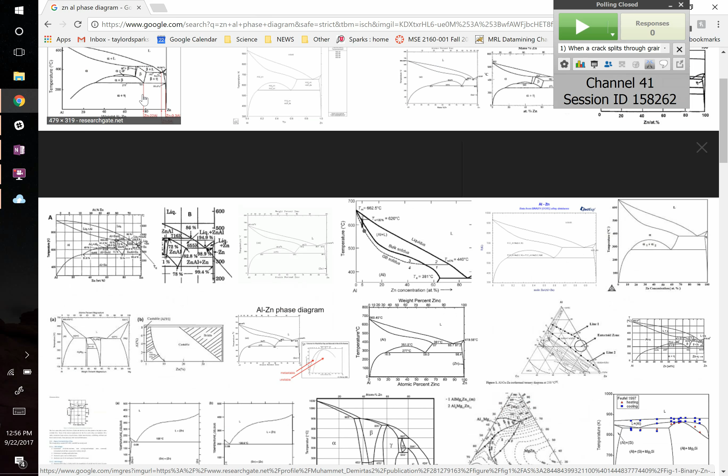It'll probably stop getting warm momentarily. Okay, anybody else getting warm? Or a bunch of duds, maybe? We have at least one work. Well, it's not cold, it's no longer cold, it's now hand warm.

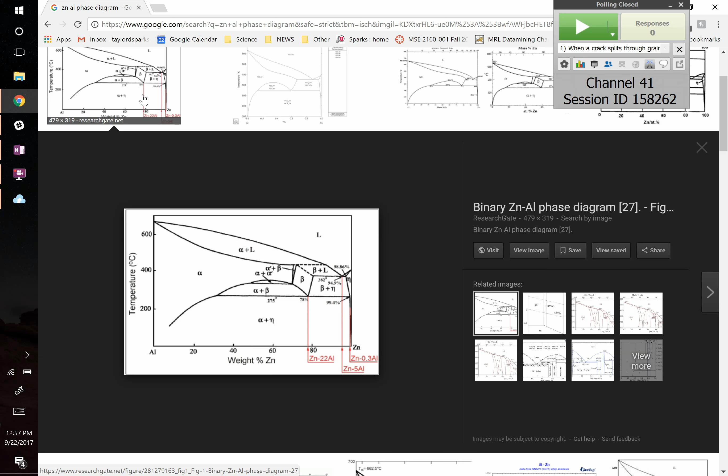Okay, while they are waiting for hopefully a few more of these things to get warm, let's try and explain what's going on. In this example, we made aluminum and zinc alloys. So we alloyed aluminum and zinc, we heated them up, we chose the composition to be exactly at 78 weight% zinc. The reason we chose that is because this is kind of a nasty looking phase diagram, and it's got some things that we haven't seen before.

You've got this alpha plus liquid, alpha over here, but then when you start going left to right, you see something kind of funny. You see this point where alpha will split to alpha plus alpha prime. This region at the top of that little disk there, that is a 2-phase region, because it's got one phase on either side of it, so it must be a 2-phase region. So what's happening there is that you have an alloy that's spontaneously decomposing into 2 different compositions.

It's not happy to stay all together. And this happens just like oil and water. If you take oil and water and mix them, they'll spontaneously demix. They're immiscible, so that's an immiscible liquid. You can also have immiscible solids.

Is that one getting warm? This one's getting warm too. Okay, so basically because of that, you get this interesting phase diagram.

What we chose to do is we made it this composition, we melted it, we cast them into shapes. By casting it, you pour it into cold sand in these kind of funny looking shapes, and now it's at room temperature. They then reheated it back up above this line. That's what's critical, it's got to be above 275. So now you're ideally in just this beta region.

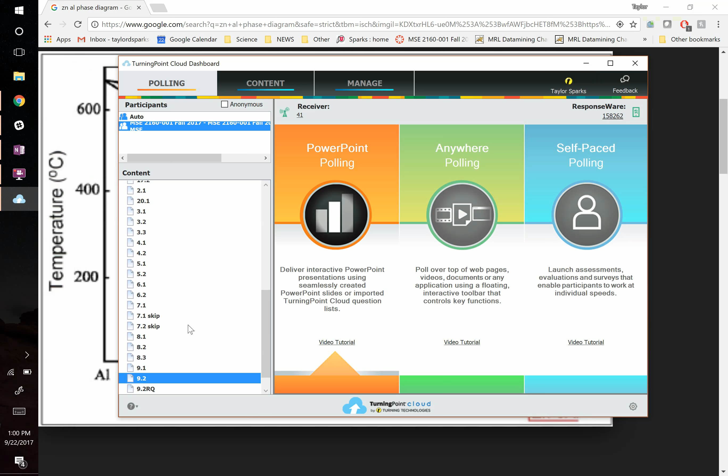First clicker question is: fatigue is A, common in load-bearing components; B, the lowering of strength in material due to repetitive stress; C, crack formation and crack propagation that eventually leads to a crack which is large enough to satisfy the critical flaw size for failure; or D, all of the above.

Absolutely. The rocket ship.

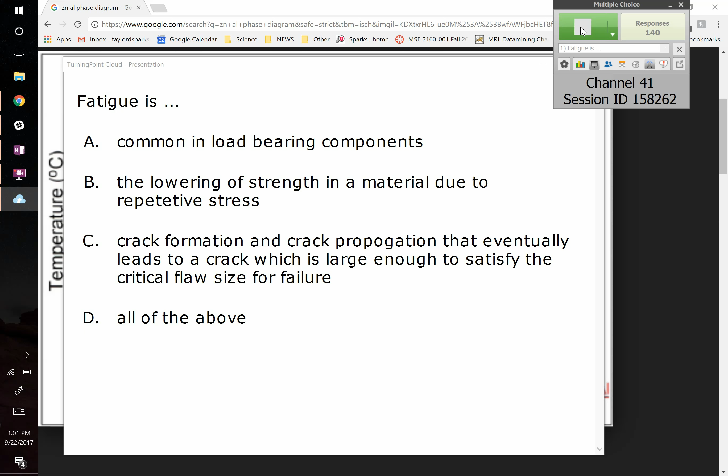Okay, get your answers in. We're going to close the poll for the first question. Okay, people think A, B, C, or D. D is definitely the right answer there.

Next one: a material with a fatigue limit will continually grow weaker and weaker as cycles progress. True or false?

Jeff, when you start from cycle 1 and cycle it to an arbitrary number, it will always grow weaker and weaker—is that statement true or false? By weaker and weaker, what I'm saying is it's going to fail at a lower and lower stress. Is that a true or false statement? Get your answers in.

That is definitely false. When a material has a fatigue limit, it basically has a threshold, and below that it's not going to fail due to fatigue. So it doesn't get weaker and weaker—it gets weaker until a point, and then it plateaus, and then you're good. Aluminum doesn't have a fatigue limit, which is why aluminum will just get weaker and weaker if you flex it back and forth, but steel does—it reaches a bottom limit.

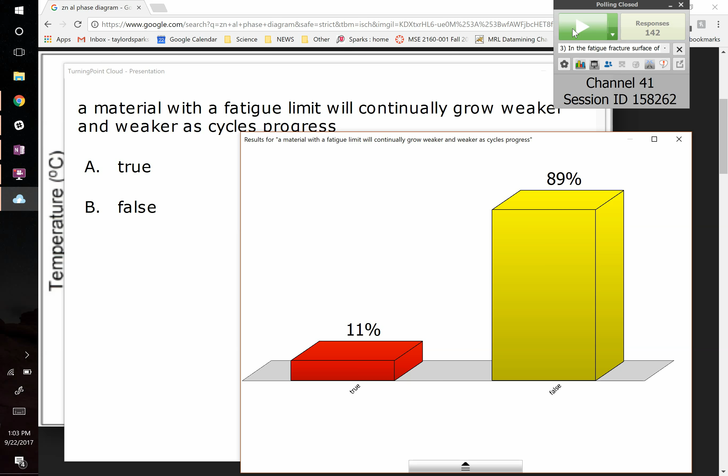In the fatigue fracture surface of a steel shaft shown here, which of the three regions illustrates the propagation of the fatigue crack with beach markings? So where do you see beach markings? Hint: they look kind of like a beach.

Okay, we're going to close the poll. People think, hopefully, B—yes they do.

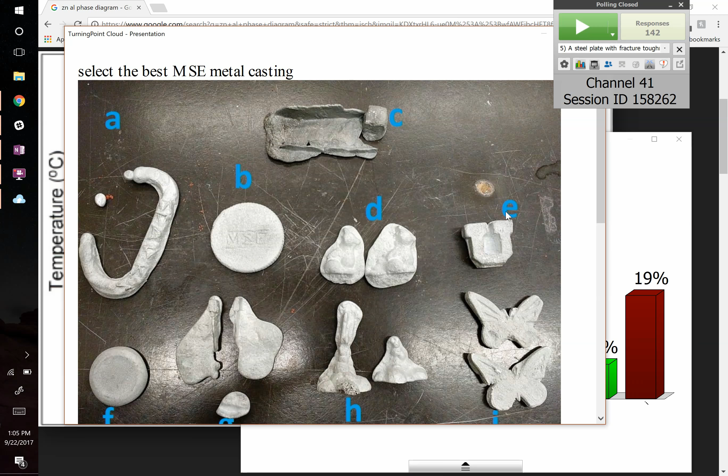Okay, we're now going to pick up where we left off with this crack growth equation. Let me remind you the question: a steel plate is given, and you know the fracture toughness. We're told it's alternately loaded between 500 megapascals tension and 60 megapascals compression. We know what the crack growth constants are, A and N, sometimes called C and M—I apologize, I did not make the rules, some people use different names. In the homework we have A and M, so M and N you can use interchangeably; it's still the exponent, so I apologize for that. Then it asks: if this thing has to survive 10 years being cycled every 5 minutes, how big can the largest surface flaw be?

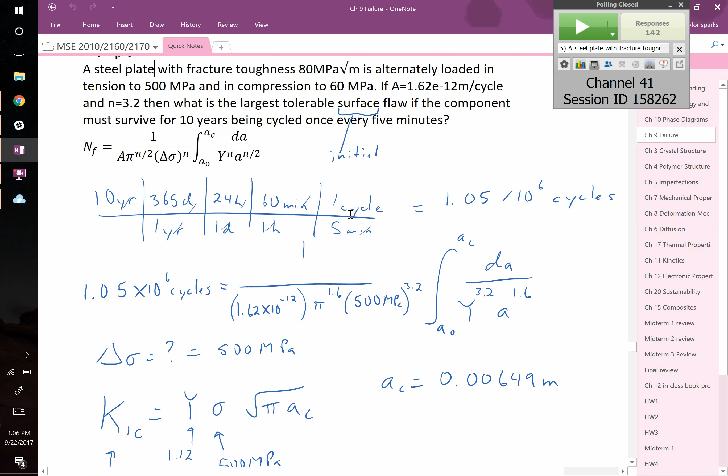Because you're going to assume that surface flaw is going to grow over the lifetime of this component, so how big can it be? We set this up by first solving for the number of cycles it had to survive, going from years to minutes, then dividing by 5. We then said the number of cycles will be equal to 1 over A pi change in stress, raised to the n, raised to the n over 2.

The change in stress, we did not account for compressive stress, because in this class we assume cracks only grow under tension, which is not always true. But for mode 1 cracking, that's the assumption we're making. That's multiplied by the integral from the initial crack size to the final crack size, or the critical crack size, dA y to the n, a to the n over 2.

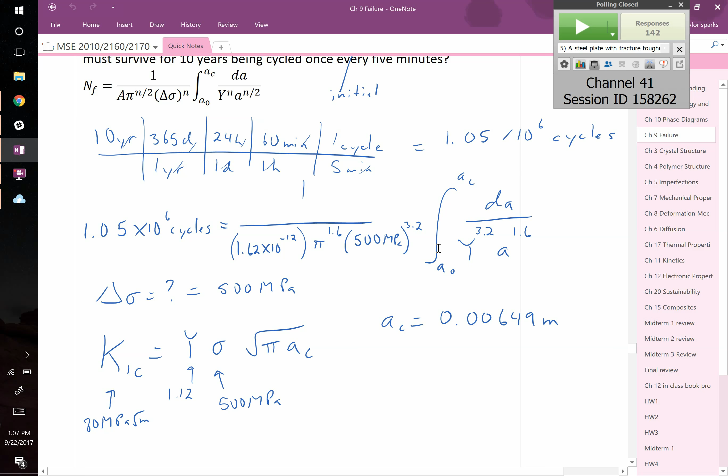And then we reminded ourselves, how are we going to solve this since it's asking for A naught, and we have 2 unknowns right now, both AC and A naught. We remembered that we can use the Griffith fracture toughness equation to solve for AC. The critical flaw size is going to be 6.49 millimeters. So our initial flaw size, we know it has to at least be smaller than that, but how much smaller?

So the next step, for the next clicker question, I'm going to have you finish this by evaluating what's in front of this integral, evaluating the definite integral, and solving for A naught. We'll do 5 minutes tops for this. You'll put your answer in micrometers.

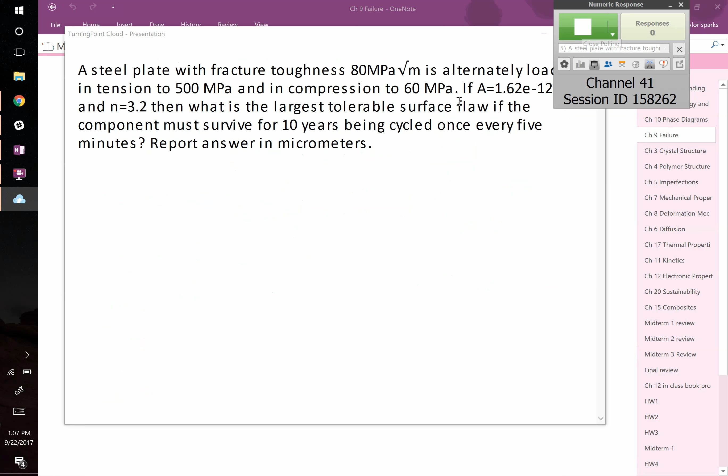Yes, in this case you're going to assume that y is constant. If I don't tell you otherwise, you can assume that y equals 1.12, and therefore it can come out of the integral. On a midterm, that's all I will ever do. On a homework, you have an example where you have to leave y in. For this class, you can bring it out on the midterms. And if you need help, we have a couple TAs, so raise your hand and we can come around and help.

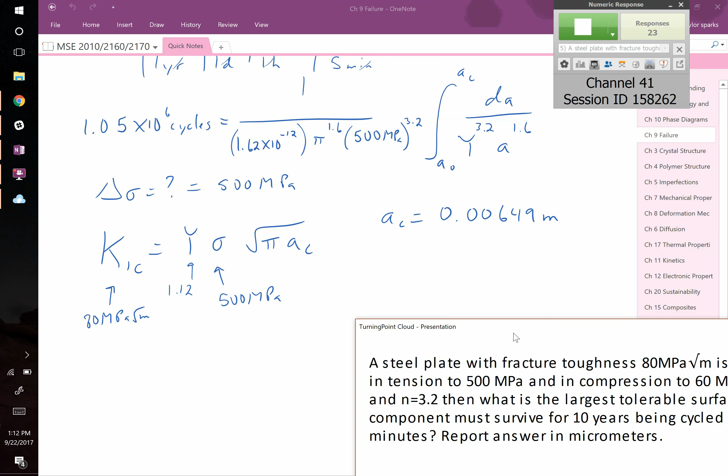For those that have forgotten how to take that integral, I'll write this out. 1.05 times 10 to the 6th cycles equals, well, let's just write a number in front of the integral. The integral, when you evaluate it, you're going to evaluate from AC to A naught, and the integral itself is going to be -5 over 3a to the 3/5, or in other words, -1.667 over a to the 0.6. You evaluate that from AC, which you know, to A naught.

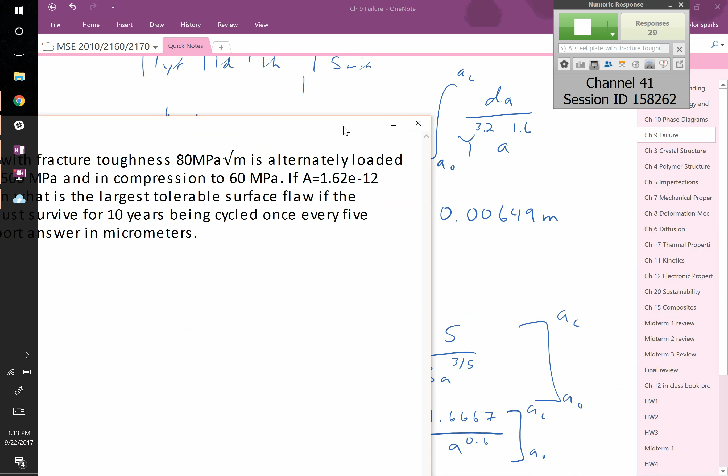Okay, another couple minutes, we'll wrap this up. I'm going to get this out of the way, but remember, you need your answer in micrometers.

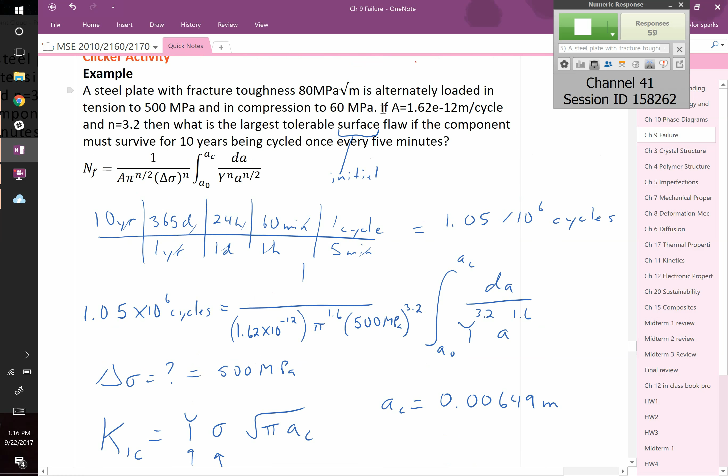Okay, there was a good question on units. Somebody asked, do you have to convert this 500 megapascals to pascals? No, you can leave that in megapascals in this question. The way you know that is they normally give that in your units here for your A and M. In this case, if you leave that in megapascals and you do these, you're going to get your answer in meters for your crack length. So to go from meters to micrometers, multiply it by 1,000,000.

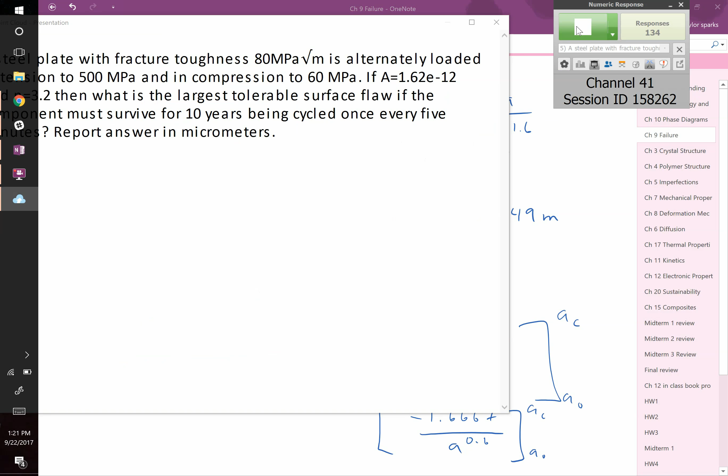Okay. If I leave y in the integral, I get 1.159 over a to the 0.6. Right, that's leaving y in, or you could factor y out and have the answer I showed you before.

You're evaluating that from a naught, which we do not know, up to ac, which we do know, 0.00649 meters. I plug in the next step and I get is equal to 264.66 over a naught to the 0.6 minus 5438. And finally, solving for a naught, I come up with 9.97 times 10 to the negative 7 meters.

And when you convert that to micrometers, you multiply it by 1 million. So that's just equal to 0.997 micrometers. So if you put in anything from like 0.8 to 1.2, you would have gotten the right answer there.

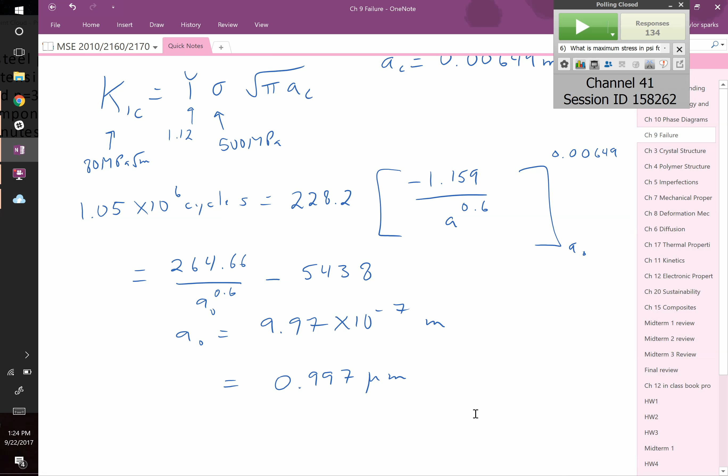I have one question. Yeah. How likely is it that something like that will be on the test, and how much of that whole process will we have to know?

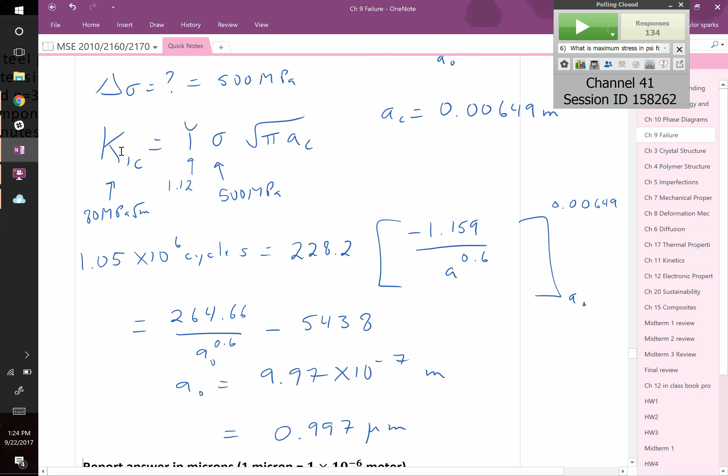This will, without a doubt, be on the test. And you'll need to know how to use the NF equals the big long equation integral. You'll need to know either how to take the integral yourself or know how to use the pre-written solution that's in the book. You'll need to know how to use Griffith's fracture law, maybe to figure out a critical flaw size, assuming that you knew the starting flaw size. There's lots of ways to ask these questions.

I could ask for the number of cycles till failure. I could ask for what the initial flaw size was, like in this one, or I could say how many cycles, if it lasts a million, how big was the largest flaw size when it did fail? So lots of things we could ask. I could have you solve for the critical flaw size, and then I could say, therefore, tell me what the fracture toughness of your material is, where then you plug that back into Griffith's fracture toughness. So a gazillion ways to ask questions about this.

Just like before, we'll post a practice midterm that will show you a few ways we've done it in the past. But really, there's no substitute for practicing this and making sure that you can work it relatively quickly, because you won't have 15 minutes to work on just that part. You'll have about 7 or 8.

Yeah, Jan? Question about the first reading quiz question. Question about, sorry, what's that? Just the first reading quiz. Okay, what was it? So something under like a constant level, does that experience any sort of cyclical cycles of stress, or is it just purely?

Good question. If it's a constant load, we mentioned this last class, things can fail under a constant load. We call that static fatigue. It's particularly important for ceramics. Static fatigue meaning it's under a static, so it's not changing load.

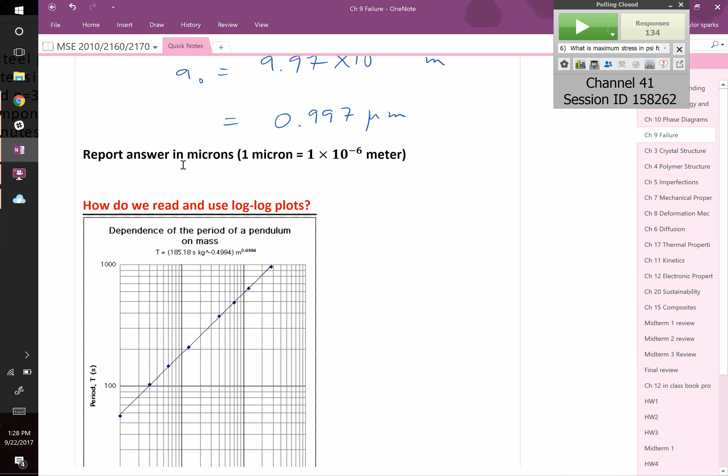Anthony asked: what was an ultrasonic scanner though? Could that also cause some of these cracks to grow as well? Yeah, you betcha, right? An ultrasonic scanner produces a little vibration. Will that grow the crack? Sure, probably a tiny, tiny insignificant amount, because the amount of energy from the ultrasonic is really, really small—nothing compared to the flexing the plane experiences when it flies.

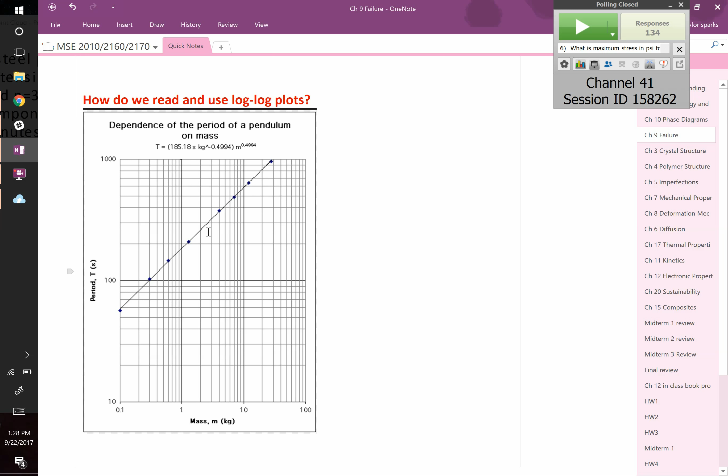Okay, let's answer the question: how do you read and use log plots? This came up last year as well, I forgot to talk about it sooner. Log plots are useful for making things that aren't linear look linear—that's really the only reason why we use them. Back in the day when we didn't have a computer that could solve all our problems easily, it was much nicer to make complex mathematical expressions look linear, and sometimes that can be done by plotting them on log plots. An example is what we saw last time.

You had this dA over dN equals A times the range in the stress intensity factor raised to the n. That's an exponential figure, right? But if you plot it on a log plot, where you're plotting natural log of dA/dN against the natural log of the stress intensity factor range, it looks linear.

So how do you read these plots? First thing to know is that their major and minor axes are scaled differently. By major and minor axes I mean major and minor tick marks—that's maybe a better way to put it. Your major tick marks are equally spaced: here's a major tick mark, a major tick mark, a major tick mark. But the minor tick marks are not spaced equally; you take this big jump and it gets progressively smaller as you approach the major tick mark.

Every major tick mark goes up by one decade, or one power of 10. It goes from 10, multiplied by 10 is now 100, multiplied by 10 again is 1,000. So if we did the next one down, it would be 1, and then it'd be 0.1 below that, and you could keep on going.

Because of that, your log plot can never reach 0. It's just going to keep on dividing by 10, and it'll never actually reach 0.

The other thing to note, when you look at the minor axes, let's take this one. If this is 100, the next minor tick mark up is 200, then 300, 400, 500, 600, 700, 800, 900, and 1,000. But instead of going to 1,100, the next tick mark up would be 2,000, because you go 1,000 to 2,000.

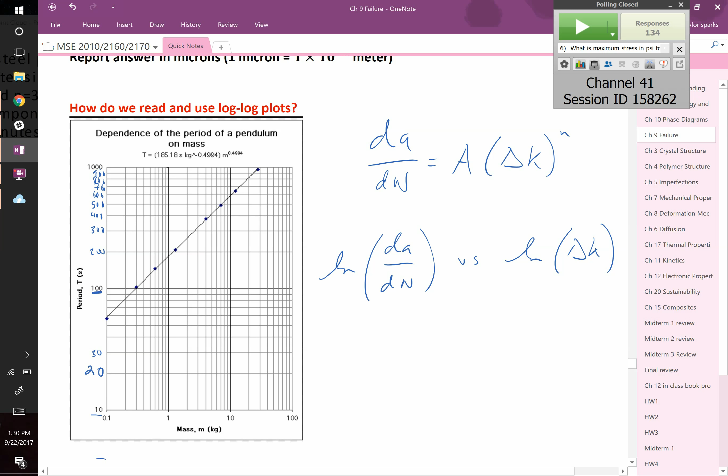Arthur asked, is that 20 or 28? That's an ugly 20. They go in powers of 10, right?

Okay, let's keep going. So what other factors affect fatigue life? Mean stress. So, mean stress.

Let's say that your materials have the same amplitude, stress amplitude. What was stress amplitude again? Again, stress amplitude, if your stress is doing something like that, your stress amplitude is this distance divided by 2. So that distance is sigma A, right?

Rosa asked, what if 0 is in the middle? Why do we take the amplitude divided by half and not just go, like what if this is 0 there, up to like 100? Because it's still the range that we're talking about, right?

So it's going to be, when we look at dA/dN equals A times delta K to the N. Delta K is equal to K max minus K min. So the minimum stress intensity factor subtracted from the maximum stress intensity factor. So it's a range, right?

In other words, it's going to be the oscillation around some point. So that's your stress amplitude. That's not the same as your mean stress. Your mean stress is up here, right? That's your mean stress. So if two materials have the same stress amplitude, right?

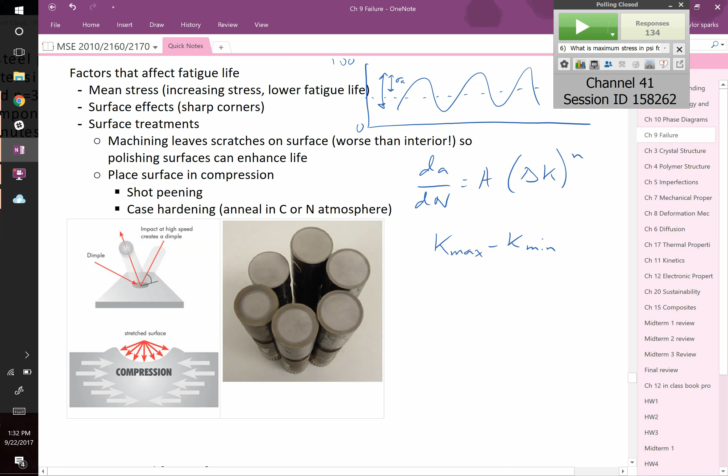So let's say 100 cycling to 200, versus 50 cycling to 150. Both of those have a stress amplitude of 50. Wait, math, sorry. Oh, that's right. Is that right? Yeah, that's right. They both have the same stress amplitude.

They have different mean or average stress. And so if all things are equal, then the mean stress, the one that is larger, will give you a shorter fatigue life. Rich, I think you have a question on that on the homework, where it turns out the range is the same, but the average, the mean stress, is higher for one than the other.

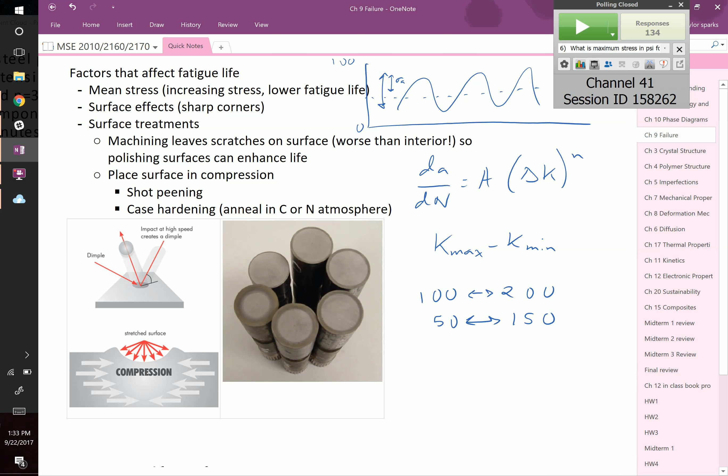Arthur asked, if we have a homework problem where there's two types of stresses, for example the first one where there's one that's like 500 and the other that's 200, if we have to plug a stress into the equation to find, say, KIC, do we plug in the amplitude or just the one that's the biggest?

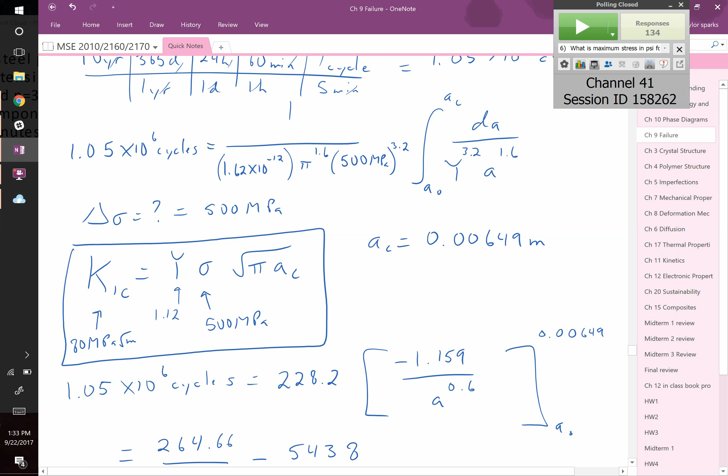Great question. It depends on which equation you're putting it into. If you're using the Griffith fracture toughness equation right here, this is telling you when something breaks. So that will not break from a range, that's going to break from a maximum value, right?

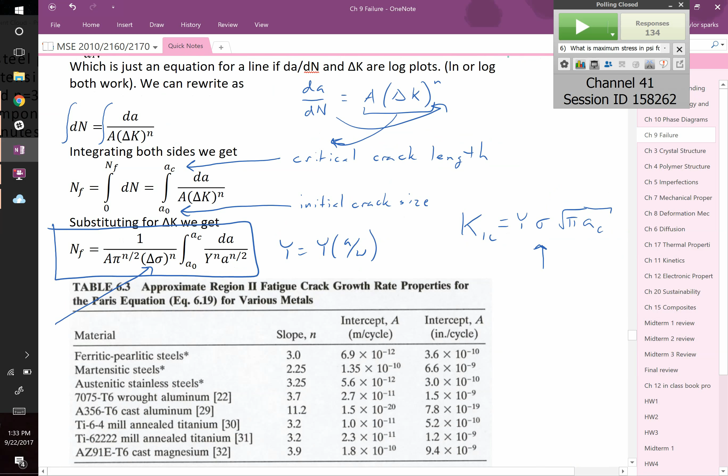But if you're using this equation, where do we have it written out? Right here. If you're using this equation, you use the range for it. Your delta sigma there is the change. Anything else I can clarify here?

Okay, other things that can influence it: surface effects. Obviously we know surfaces are a problem because your crack is basically twice as dangerous at the surface. If it's the same length, it's twice as dangerous. Because of that, there's a lot of surface treatments that they do. For example, when you do machining, all you're doing is scratching the surface in a controlled way, like taking sandpaper and just scratching it.

Hopefully you're removing flaws that were there that were larger than the flaws that you're going to put in there by scratching it. So if you have like a big millimeter deep scratch in your component, but you polish it with like 600 grit sandpaper, your scratch marks are tiny, way smaller than 1 millimeter. So you've overall improved your sample there.

They do other things though. They'll do something called shot peening, or case hardening. Both of these place the surface in compression. Again, with crack growth, we're assuming that cracks don't grow under compression - that's valid in some circumstances. So if you can put something in compression, before it can reach a tensile state it has to overcome that compression. If tension is going to make that crack grow, but you start off by squeezing it, it has to overcome that squeezing force first, and then it can start pulling it apart. So putting it under surface compression is a great idea.

One way they do that is shot peening, where they basically hit it with like BB guns. It's more scientific than that though - they spray it with little tiny beads, and it puts a bunch of little indents in, densifying the material around it and putting it all under compression.

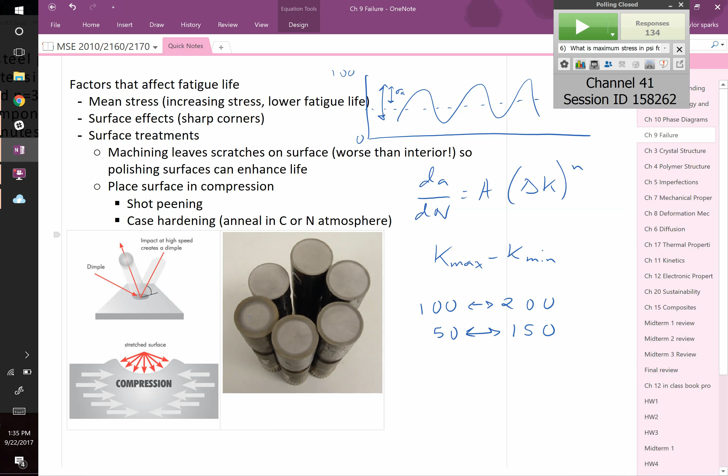Another way, which we'll talk about in a few chapters, is case hardening, where you diffuse in a larger atom, or just atoms that will fit in between the other atoms and squeeze it closer together. So you can do it with carbon or nitrogen. That's how titanium carbide or titanium nitrides are made, which have a harder surface than the bulk underneath. We'll come back to that later.

All right, let's talk about other factors - thermal stress. We've mentioned this over and over, that even though you don't think your part's under oscillating stress, temperature range can be a big deal. So the stress that it produces, the thermal stress, is going to be equal to the difference in the thermal expansion of your two materials. That's delta alpha L.

So basically you have the thermal expansion L for, let's say, your ceramic, minus the thermal expansion L for a metal. These things are typically about an order of magnitude apart, so that value right there could be an order of magnitude - call it 10 for a moment, or, well, I guess it depends. That's multiplied by the modulus of the material that's going to fail, times the change in temperature.

So if you have a big ceramic plate and you bond it to a piece of metal, and then you cycle this thing - put it in ice water, hot water, ice water, hot water - the one that's going to break is definitely going to be the ceramic, because it's the one that can't tolerate stress, or strain, excuse me. So you could calculate the amount of stress generated by plugging in the modulus of your ceramic, multiplied by the difference in thermal expansion and the difference in temperature. That will give you your thermal stress. Questions on thermal stress?

Yeah, Jeff - so they use the modulus of the one that will break. Now, if you don't know which one's going to break, you could calculate it both ways. You could plug in the stress assuming ceramic, and then calculate the stress in your metal. It's valid, and it's the same stress - one's going to be compressive, one's going to be tensile, but it's the same magnitude. The one that's under tension is usually the one that breaks, and it's usually the brittle material that breaks.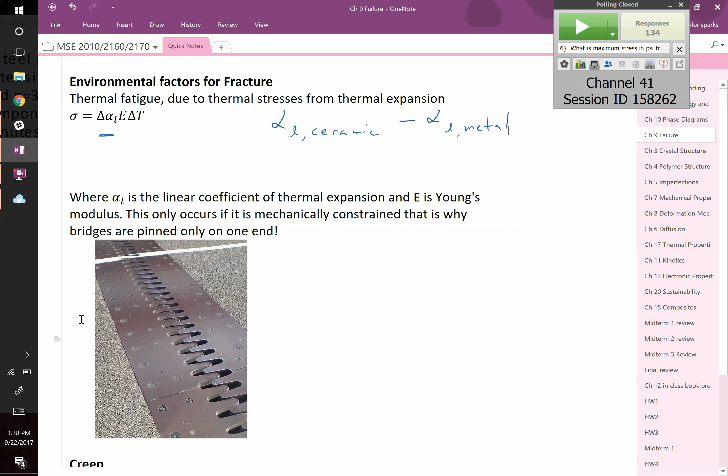Again, in your statics class, if you've taken it yet, you notice that they'll pin one side, but they'll put the other side of the bridge on a roller. That's exactly why they do this - you can't pin both sides or you generate huge thermal stresses.

Okay, let's talk about creep. Creep is another property that's really important for material science. What is creep? Creep is time-dependent, permanent plastic deformation.

Which means if I take something like this bottle, and I hold it here like this, it has a stress on it - the weight of this water and the fact that I'm supporting it from the ends tells me that there's a bending moment in this. It's going to have a maximum stress in the middle of this bottle, wanting to bend this bottle. And it's not bending, right?

But if I hold this thing here for a year or 2 years or 10 years, you might notice that it actually bends quite a bit. It's just really slow. So think of creep as plastic deformation that doesn't happen immediately - it takes a long time for it to happen.

You can see this in bookshelves. In this bookshelf, it had a bunch of science books on top of it, and over the years, it's groaning under the load of science, and it's creeping. That's absolutely why - or maybe it's the Godzilla right there. I don't know.

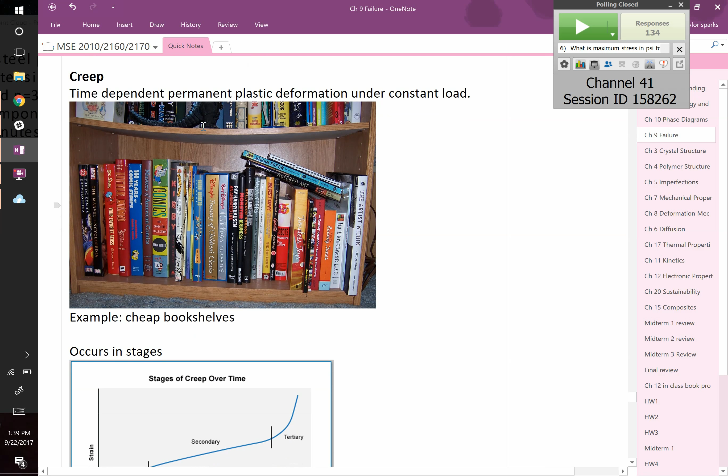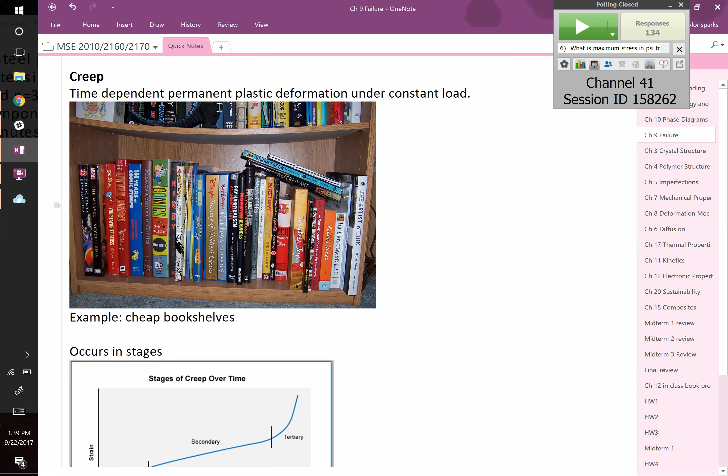So that's creep. Just remember, it's plastic deformation, but one that occurs over a time scale which is longer than your typical plastic deformation - something that's happening slowly. So how do we model creep? It's important to know about. We have a model that basically shows strain over time.

You're going to have some initial elastic strain. We'll talk about elastic versus plastic later this semester, but elastic is the recoverable, reversible one. Somebody had a question about that a few classes ago - like you take a rubber band and you stretch it, it's going to go back. So that's the elastic part. As soon as you load something, there'll be some elastic strain.

But then you have this primary, secondary, and then tertiary creep. Primary and tertiary are non-linear - they do things that are hard to predict. But secondary is linear. Linear things we like because we can predict them. Once you know what that rate is, you know what it's going to be in 5 years from now. And if you're designing a home or a bridge or whatever, that might be useful to know.

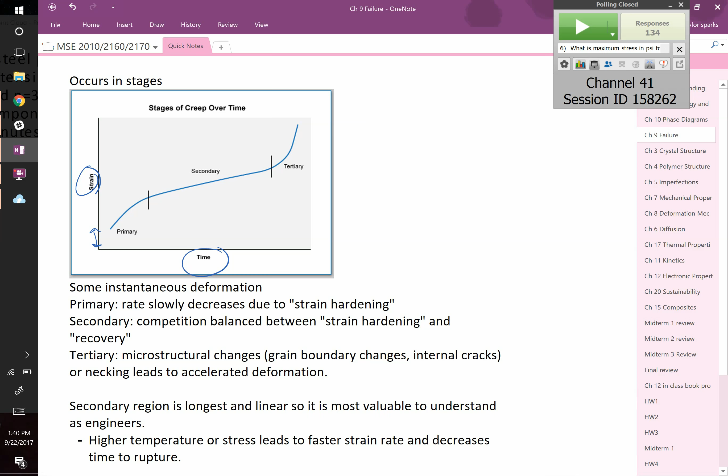So let's talk about this. The expression that we use to show the strain rate - that's epsilon with a dot on top of it. The dot on top just means the rate. So the rate of strain is going to be equal to K times sigma raised to the n, so that's your stress raised to some exponent, multiplied by the exponential of negative Q over RT.

Q is what we call an activation energy, and we will come back to it many times this semester. There's not one activation energy for materials - there's a different activation energy for whatever your process is. There's an activation energy for diffusion, which describes how atoms hop around in a lattice, and there's a different activation energy for creep. And there's a different one for electrical conductivity, which is how electrons move around. So it's just an activation energy.

And so this is what we call a thermally activated process, meaning the higher the temperature - if you plug in a higher and higher number here, since this is exponential to that negative 1 over a large number, exponentials can become a larger and larger number.

So the higher the temperature, the faster your creep strain rate. Maybe that makes sense. You have a bookshelf at room temperature versus one in Arizona, where it's warmer—you'd expect it to creep a little bit more because it's warmer, right?

Rosa, question? Is the exponential part exponent to the exponent n? That's the same as writing e, the natural number, to negative Q over RT. Oh okay, yeah, that's what that is.

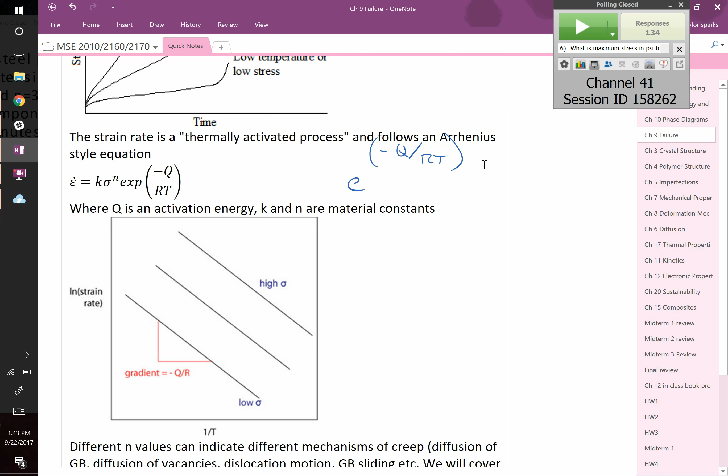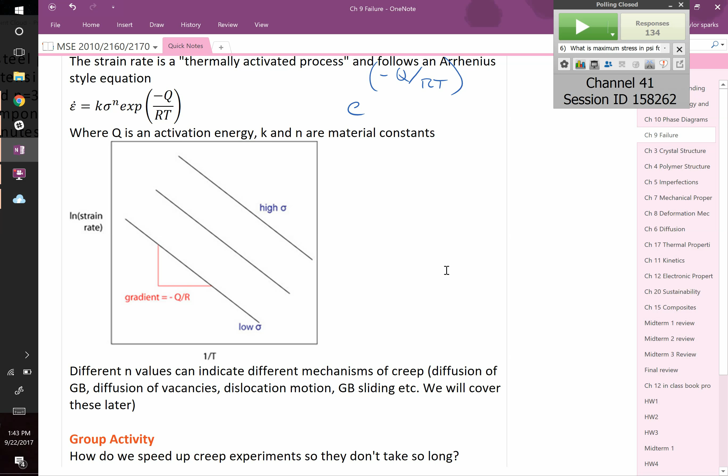Yeah, Anthony? I just have a curious question: if you were to approach the temperature, make the temperature really close to absolute zero, would it cause those atoms to just fall apart? They would not fall apart, but there would not be motion. And we can't get all the way to absolute zero—we've gotten really close, but we can't get there.

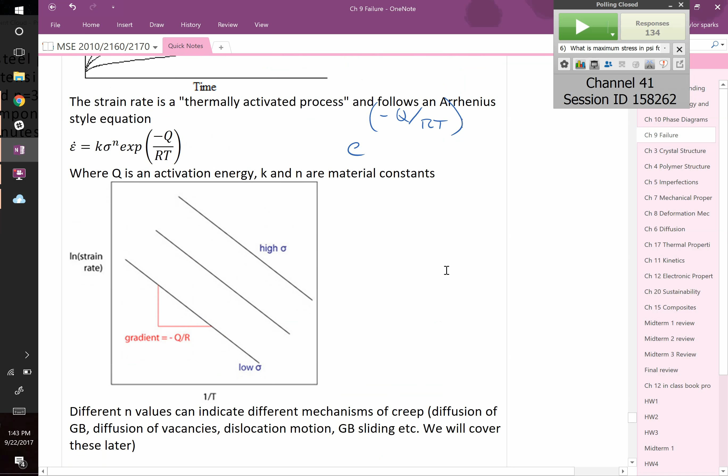I was just curious though—if you got really close, would it continue along that curve, or would the strain rate approach zero? The slope—the slope of this strain versus time here, this slope is your strain rate—at lower and lower temperatures, it's just going to approach zero. Oh okay, it's going to head towards... it'll just be not changing at all.

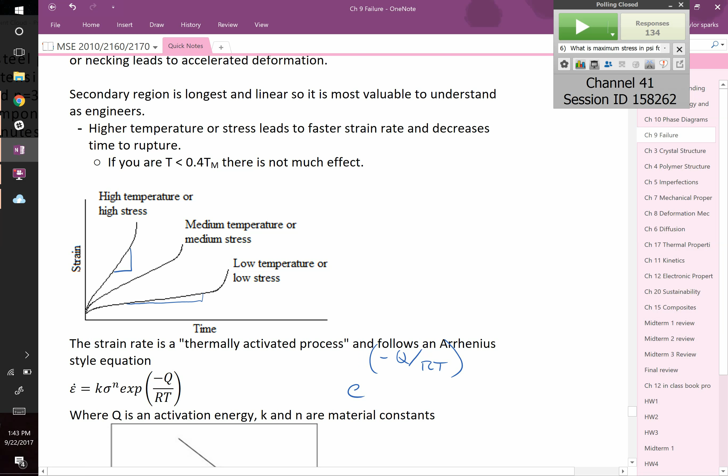So we often use another log plot. This time it's slightly different—we're going to plot natural log of our strain rate against 1 over temperature. The reason we do this: imagine you take natural log of both sides. So now natural log of your strain rate is going to equal natural log of K plus N times natural log of sigma plus negative Q over RT.

So the reason we do this: basically all of this is a constant, which then says, if you set that to be y, then this is your b plus mx, where x is 1 over temperature. Therefore, the slope of this is just negative Q over R. Your slope right there is the activation energy—that's the thing you usually care about, that's what you're usually trying to solve for. If you plot natural log of strain rate against 1 over T, the slope of that line will be your activation energy divided by R, well, negative activation energy divided by R.

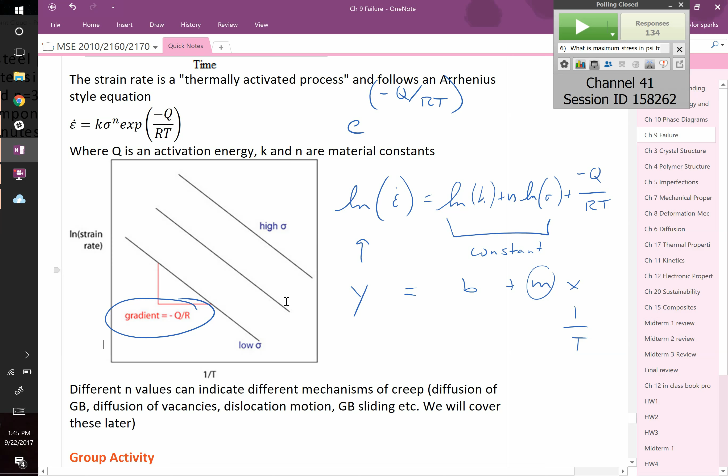Can I answer any questions about that? Did you say that constant is m? So what are m, x, and b again? Oh, y equals mx plus b is just a linear equation. So all of this constant, that's b. X is 1 over T, and m would be negative Q over R.

Okay, yeah, question? T is your temperature, R is the gas constant. Again, the gas constant is... and we'll pick up here next time and wrap this up and then start chapter 3.